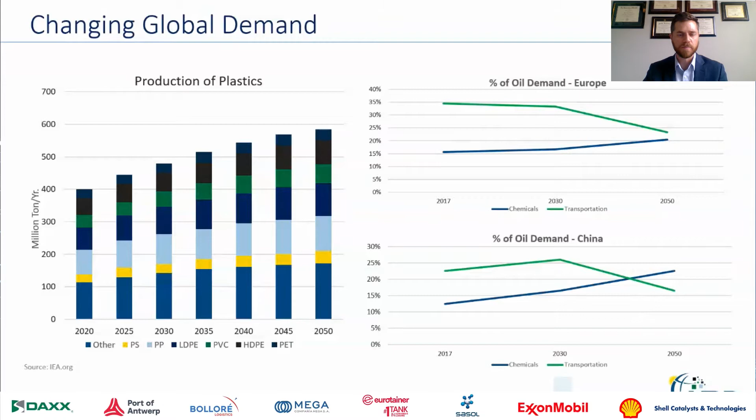As we look at the global market right now, we can see that the demand for plastics and the production of plastics is increasing and is expected to continue to increase through the foreseeable future. Here we're showing the demand for plastics out through 2050, across a number of different types of plastics.

On the right side, we can see a percentage of crude oil going towards different markets - chemicals versus transportation. Currently, predominantly crude oil is going towards transportation fuels, but in the future we're seeing an increase in the percentage of crude going to chemicals. There will be an inflection point potentially in some regions where more crude will go to chemicals rather than fuels.

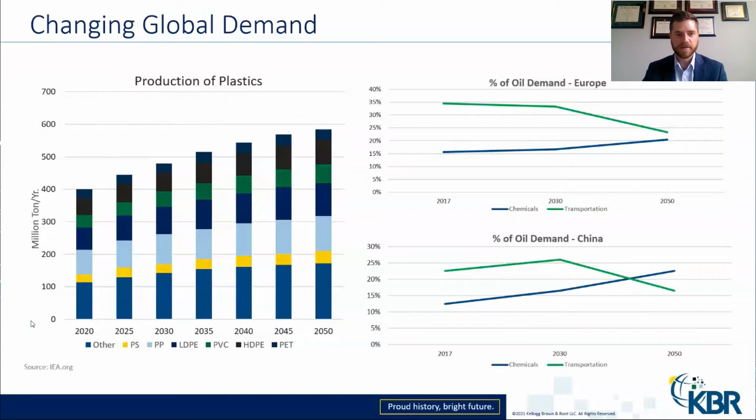So what are the site-specific drivers if you're a refiner? First of all, it's a path to improvement - it can increase your margins and the resiliency of the refinery. It's an enabler to monetize low-value streams, so you can take residue, fuel gas, and potentially monetize that to chemical value, which is a large margin uplift.

It's a way to respond to regulatory pressures - as you find certain streams may violate specifications, maybe you can upgrade that stream to chemicals and remove it from the fuels pool. It's also a way to diversify and shift to the future.

As we saw from the demand graph, petrochemicals is the future. It's also a way to diversify and hedge exposure to cyclical markets - there's often cyclicality in both fuels and petrochemicals, and if you're diversified in both you can hedge against those peaks and troughs. Finally, there are single-site synergies between refinery and petrochemical assets - the ability to reduce overhead, and synergies between utilities and other things that make a site more efficient.

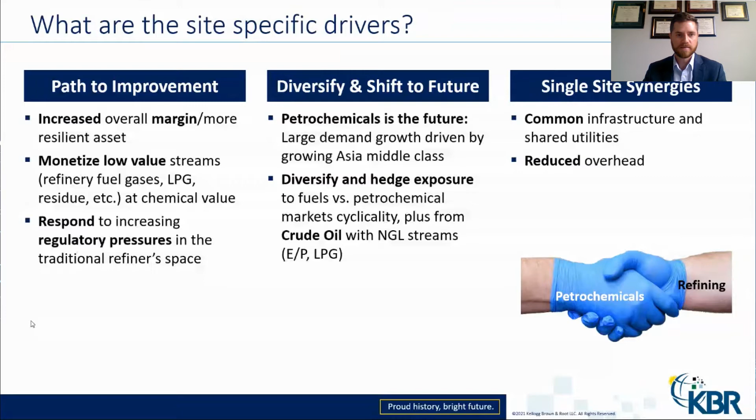I talked about the resiliency of an integrated refinery. On the graph on the left, we show the margin of several different products within the refinery - gasoline, diesel, and naphtha - with the bottom bar showing crude oil cost. Looking at the margins between these products, gasoline and diesel margins are strong, particularly in the retail market where you gain a little margin. However, if we compare this to naphtha margins, we see a much larger margin that can be realized going to ethylene and even polyethylene.

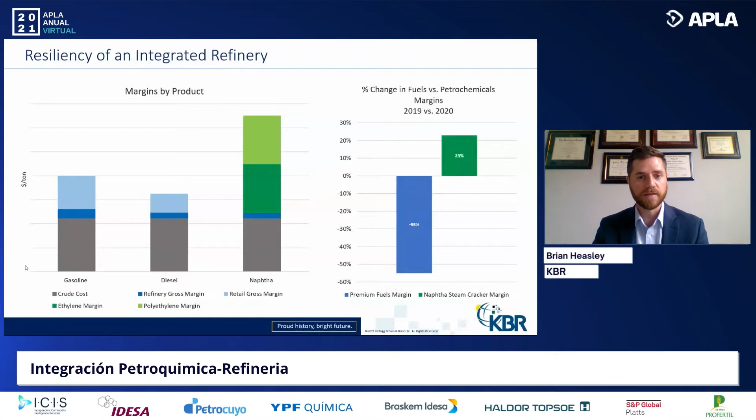The graph on the right shows the change in margin we've experienced from 2019 to 2020. As you can see, fuels margins reduced in the challenged market during COVID, while petrochemicals actually increased. So both in absolute margin and relative change in margin, we've seen resiliency in petrochemicals over the last few years.

So looking at the big picture, change is coming, and it's really here. I think we've seen COVID accelerate some of this change. Our message is to be proactive, to look into integration now, to gain an edge, because many are already integrated. Many large players in the market, the fully integrated producers, have an edge. So those that are proactive now will have somewhat of an edge into the future. So the change is here now.

The middle column here, there's no one size fits all solution to integration. What I mean by that is some refineries are more gasoline production oriented, and some refineries are more diesel, distillate, jet fuel oriented. Each refinery will have its own unique solution, and there's a lot of considerations with that.

Looking at your existing site constraints, your infrastructure, what low value streams you have, what is your budget, what is the local market for different petrochemicals products. And really with this, all options should be explored.

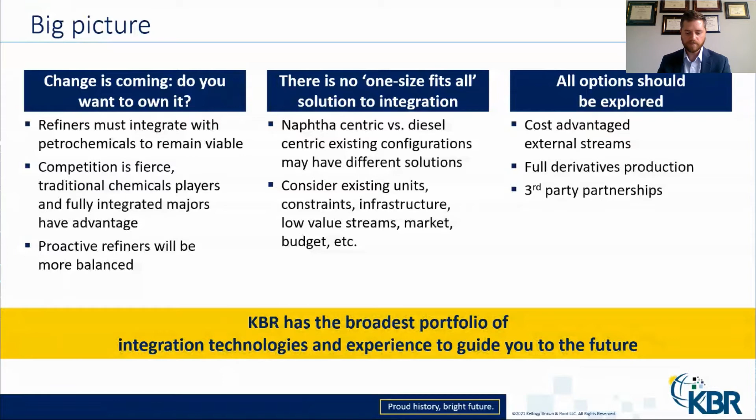What is integration? Here's some of the typical technologies and streams involved in integration. On the left, we have the typical refining technologies, so reformer, BTX extraction, hydroprocessing, FCC. On the right, we have the typical petrochemicals technologies, steam cracking, on-purpose olefins production, whether it's PDH or MTO, BTX purification, PX production, and derivatives plants that go along with that as well. And you can see the typical streams integrated between the two.

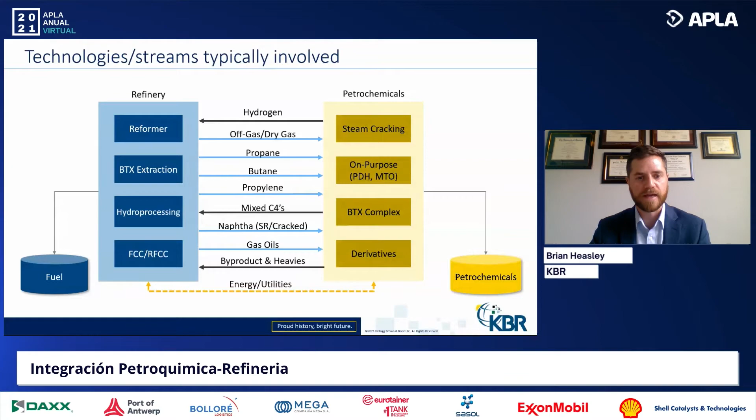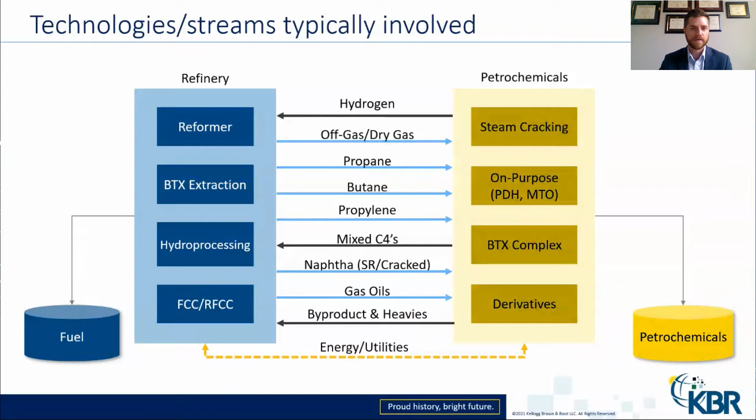So you've got hydrogen, mixed C4s, potentially heavy material from a petrochemical site. So you have some streams coming back to the refinery that can be monetized, and vice versa. You have many LPG type molecules that can be cracked to olefins at petrochemical sites. Naphtha can also, and even gas oil. So there's some synergies between these two sites. And also, there's energy and utility savings too, integrating the two. So there's really a lot of opportunity to gain efficiency by integrating these two traditional sites.

So if we go through each one of these, minimal integration is a refinery that's producing maybe refinery grade petrochemicals, no derivatives production, little to no integration with petrochemical sites.

At the major level, you're really looking at adding traditional petrochemicals conversion units to the refinery. So those would be like steam cracking or on-purpose olefins production. At this level, you may also be producing derivatives, so polypropylene or polyethylene, for instance. You may also be highly integrated with local petrochemical sites in their derivatives production.

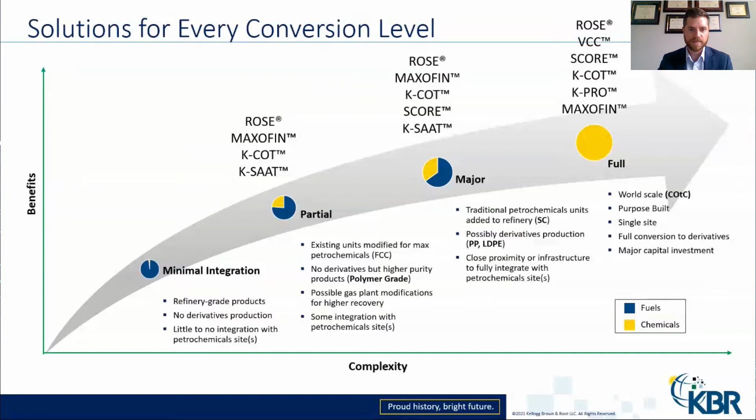Another important concept to cover when shifting to petrochemicals along that spectrum is phasing investments and really stepping along that complexity benefits curve.

So here we show for an FCC ways to stage your investment. If you look at a fuels FCC, it's maybe producing 4-6% propylene. We can boost that propylene make by changing catalysts, by doing certain things, but then we hit a limit. And the next stage is really adding a secondary riser that enables you to crack to higher propylene make.

You can get to 8 to 12% propylene with that riser, maybe without modifications to the gas plant. The next stage, moving to the right, would be modifying your gas plant and making it larger. You can get upwards of 20% propylene at this stage. And additionally, you could add ethylene recovery.

So you could add a cold box for high purity ethylene production. And you can also look at adding a K-SAAT unit, which is KBR's solid acid alkylation unit. That enables you to monetize the ethylene to alkylate, which is not petrochemicals, but it's a way to increase the value of your fuels pool to a high value alkylate, which is one of the best gasoline blending components.

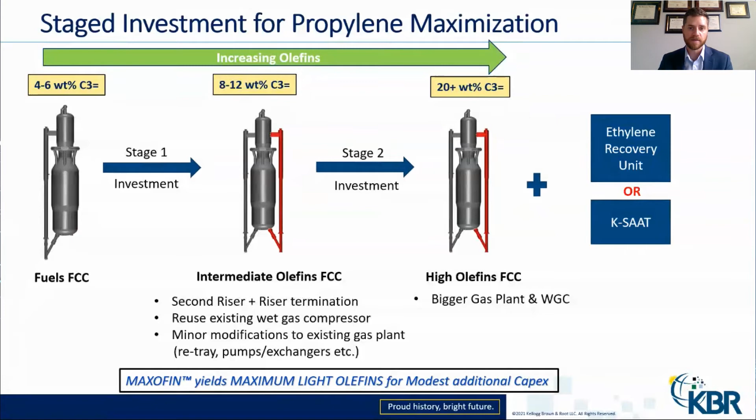What are the considerations? So the first set of considerations is on infrastructure. And you want to look at your existing assets.

Are you an FCC-based gasoline refinery? Are you a distillate hydrocracking-based refinery? That will determine which path you should go down and what modifications you need to make.

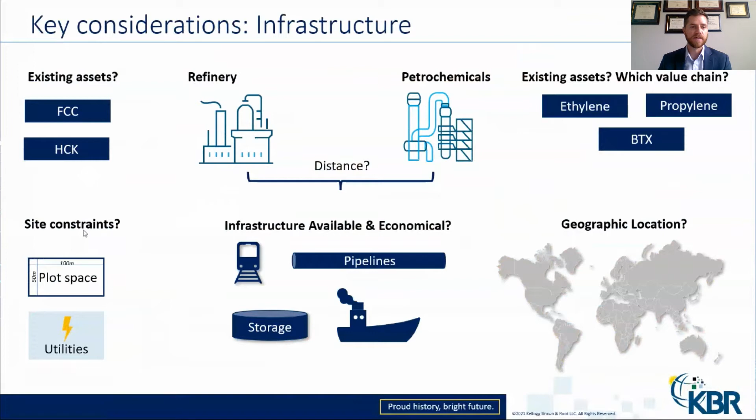You also want to look at your site constraints, so plot space, utilities, also the proximity to petrochemical sites, and what sort of products are those sites making. So if you're not going to full derivatives production, you want to ensure that your value chain aligns with the sites that you're sending product to. So there's a lot of consideration on the infrastructure side, and then pipelines, obviously, port access, these sorts of things can enable you to get to a market maybe that isn't local.

Geographic region is also important. So you have to look at where you are in the world and what are others doing in that region, and can you be competitive with them?

So one example would be on the US Gulf Coast. There's a lot of petrochemical capacity. It's very difficult to compete with some of these world scale plants. So maybe you look at producing a different product, a different derivative than that they are, and find an advantage there. So these sorts of things need to be looked at all over the world.

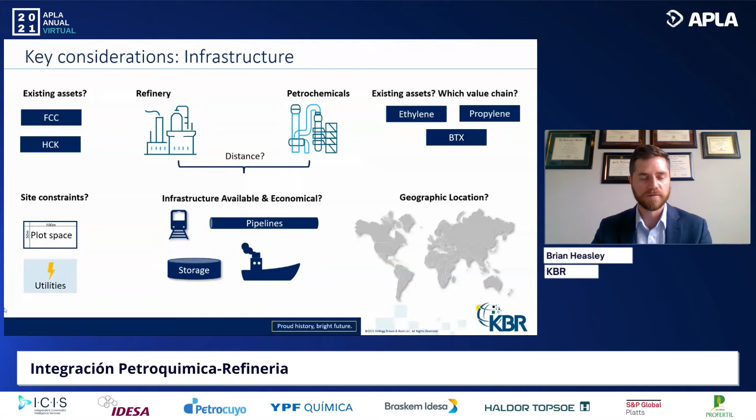Next, there's economic considerations. So can you upgrade low value to high value? That is a large uplift in margin. So residue to olefins is one example where you can really gain an economic advantage.

And then finally, a couple points on market, and you want to make sure you can access the market. Is it a sustainable market? Are you projecting growth with that market? Those are all important things to drive return on your investment.

So we're going to go through KBR's portfolio quickly here.

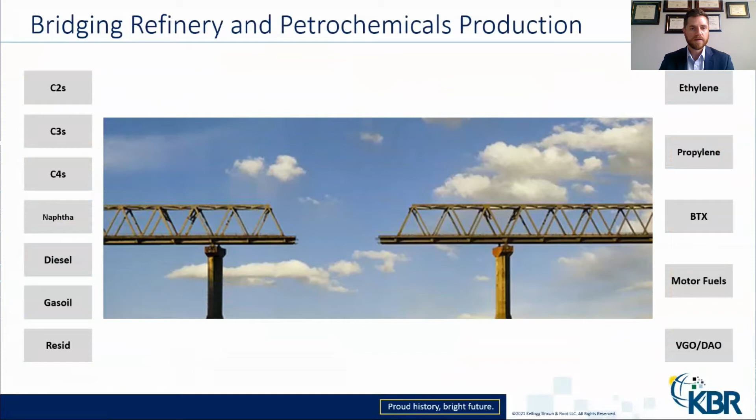The first technology I'll talk about is SCORE, our steam cracking technology, taking a full range of feedstocks to petrochemicals. You can see the feedstocks on the left, the products on the right.

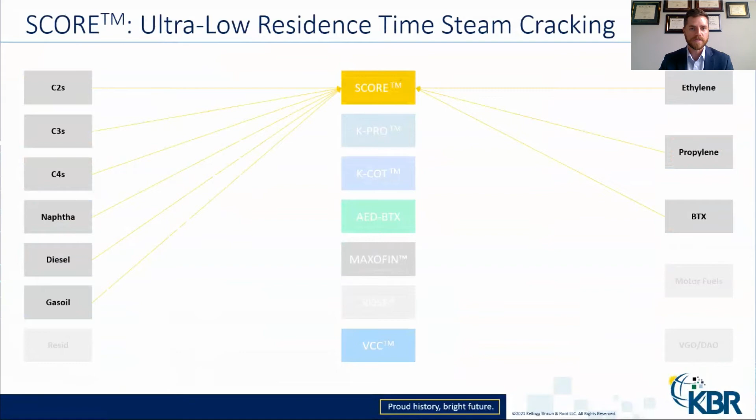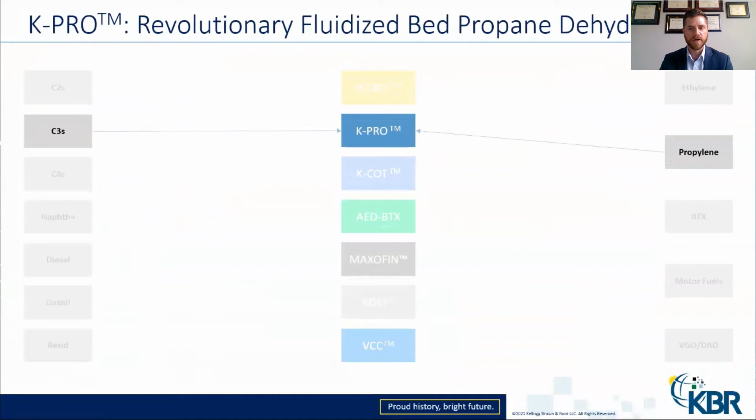K-Pro is our on-purpose propylene production unit, so taking propane dehydrogenation to propylene.

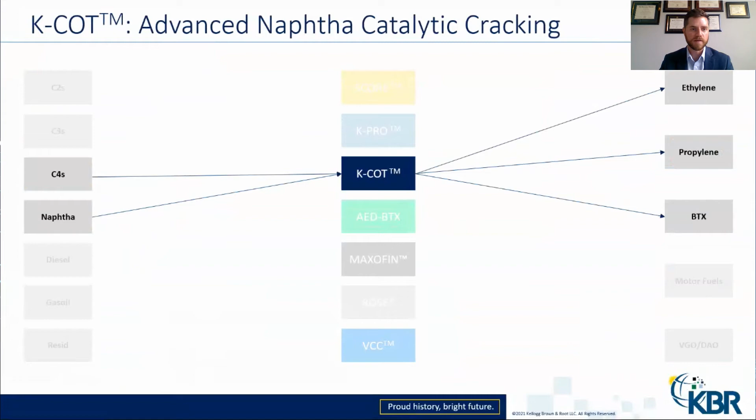K-COT is our advanced naphtha catalytic cracking technology, and that takes C4s and naphtha and can produce petrochemicals.

Aromatics extraction, AED BTX, can take a naphtha stream and extract B, BT, and BTX.

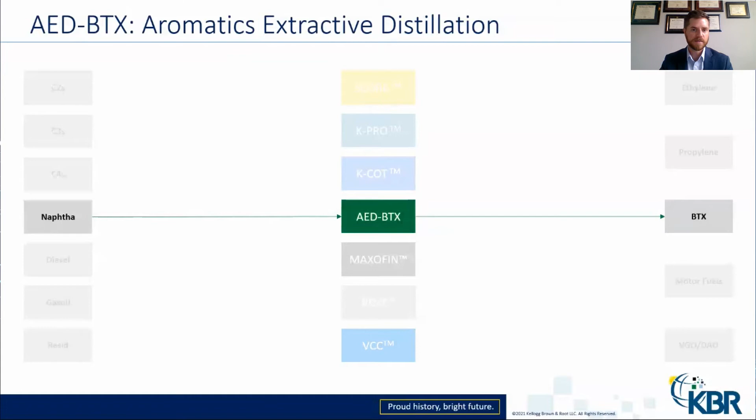Next is Maxofin, our high severity olefin producing FCC technology. This can take a full range of naphtha, diesel, gas oil, and produce petrochemicals.

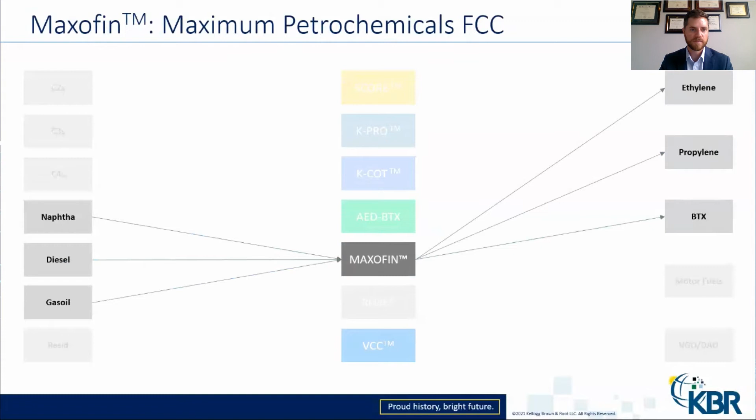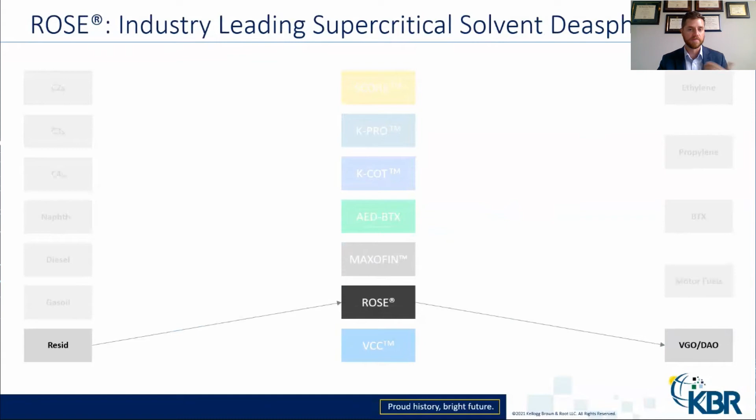ROSE is our supercritical solvent deasphalting technology. While this doesn't produce petrochemicals, it enables conversion of residue to an intermediate stream that can be diverted to petrochemicals.

And then finally, VCC. Again, this is an enabling technology. It doesn't produce petrochemicals, but it does convert residue to intermediate streams.

So what do solutions look like? We'll go through a couple case studies here. We looked at Latin America and a survey of refineries, and found that many are FCC delayed coker based refineries producing a lot of gasoline. So our cases are aligned with this particular configuration.

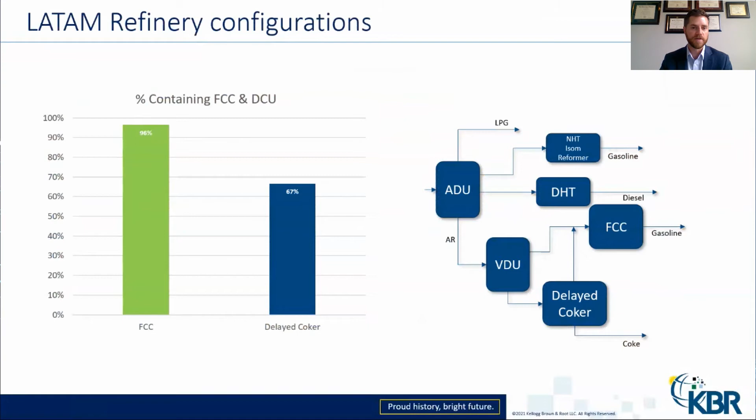The first case adds a couple of technologies, integrating with petrochemicals by boosting the feedstock and improving the feedstock quality to the FCC unit. Here we've added an SDA unit, ROSE, and a hydrotreater, FCC pre-treat unit, and those are both going to increase the feed to the FCC and improve the feed quality.

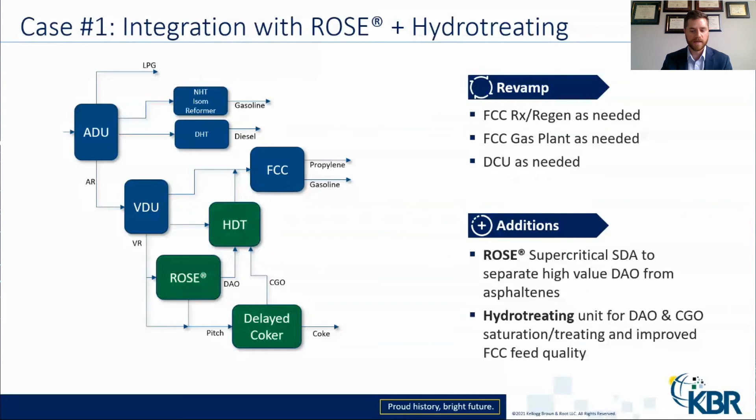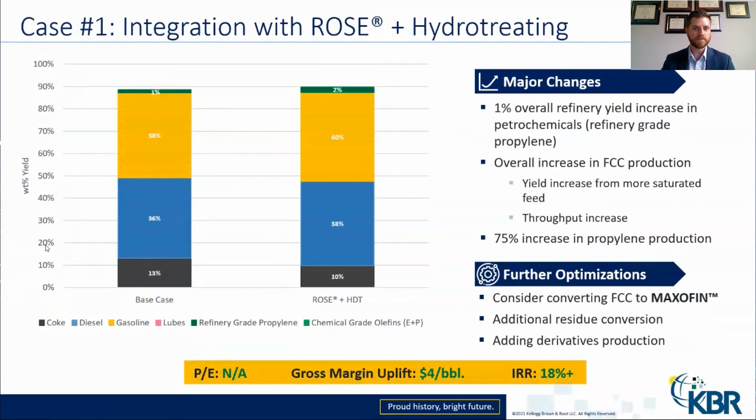Case number 2 is again an FCC coker-based refinery, same configuration. We're adding the SDA unit here, but not the pre-treat. Instead, we're revamping the FCC to a Maxofin unit, which will really boost the propylene production quite a bit higher. We're also adding an ethylene recovery unit and a K-SAAT unit.

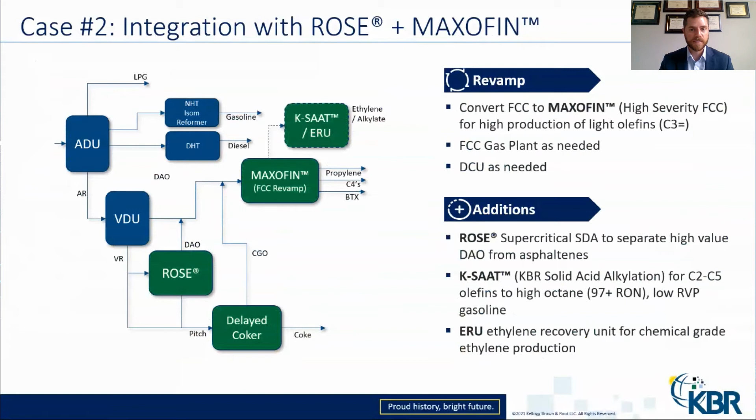The last case is a little twist on the previous one. Instead of a 2-product ROSE unit, we're taking a 3rd product, separating the DAO into an LDAO fraction, a light DAO, and an HDAO, a heavy DAO fraction. The light DAO is actually really paraffinic and suitable for lube production, so we've added a lube complex here producing a high-value lube oil product. Then the HDAO goes to the Maxofin unit to boost petrochemicals production.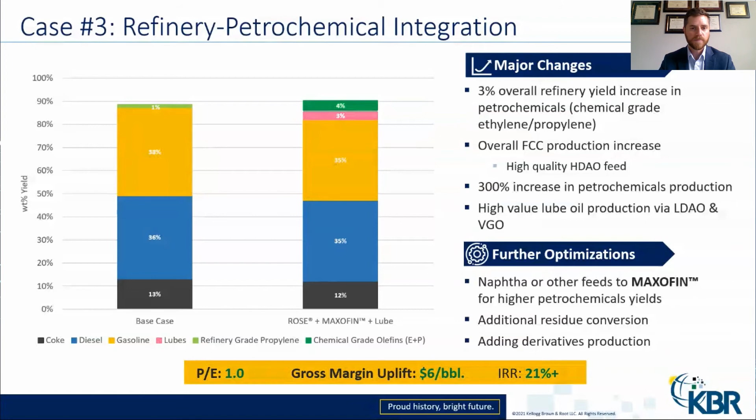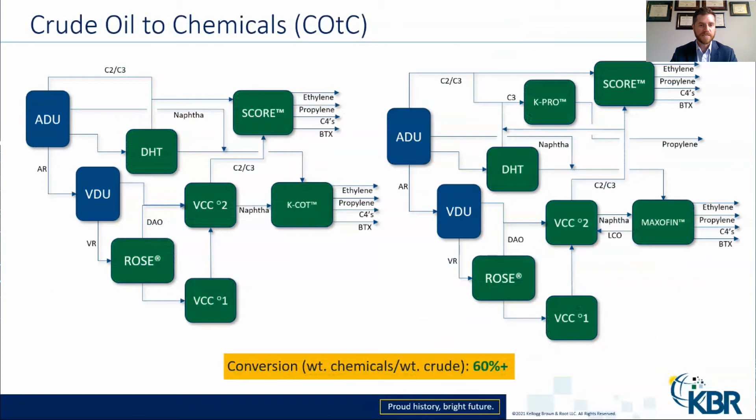Just a couple of closing thoughts before we answer some questions. Change is coming, and really change is here. I think we're seeing an accelerated amount of change since the pandemic started, and really a proactive approach is what we recommend to refiners looking to integrate to gain an edge for the future.

There's no one size fits all solution for integration, and KBR's technologies can offer unique or uncommon solutions to fit your challenges. We've got a large portfolio that I think will suit most, if not all, challenges that you may face in integrating. All options should be explored.

So whether it's creative investments, partnerships, looking at derivatives production, we encourage you to look at all options. And finally, KBR has proven technologies, a broad integration toolbox. And with that, I thank you for your time.

I think Luis, we have some questions, and we'll take those now. Okay, Brian, thank you very much for your presentation. Very interesting, in particular for people like me coming from refinery.

But in these times, refineries are constrained in capex, in particular in the last time because of the quality upgrading to accomplish environmental rules and so on. So what are some low capex or high return configurations that you might recommend using KBR's existing technology?